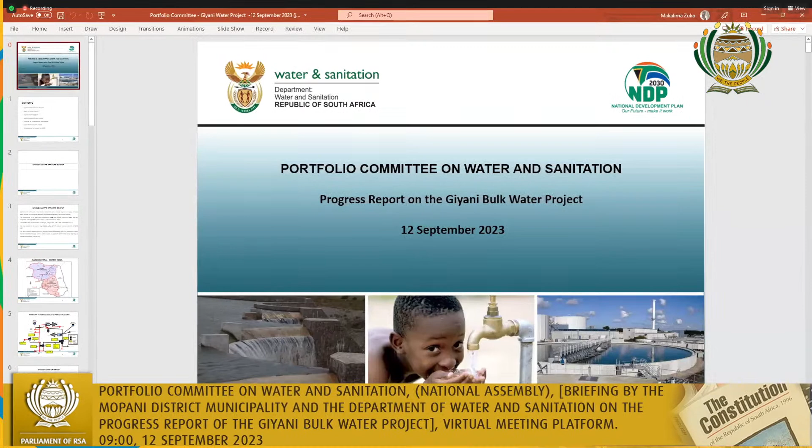Chair, I just propose that I hand over to the DG, and once they have had the opportunity to present, we can then make comments on a number of areas in the interest of time. So DG, I hand over to you. Thank you.

Thank you very much, Minister. Good morning, Chairperson and honourable members. The presentation will be made by DDG Mate. Over to you, Rizzi Mate.

Thank you, DG. Morning, Chairperson, Minister and DMs. I'm just testing to see if I'm audible enough, Chair. You are very clear, okay and cool.

I'm going to take you through the presentation on the Giyani water services. Our content, Chair, is basically to give a background. We are going to give an update to the committee specifically on the Nandoni water pipeline, or the bulk line. We're also going to give an update or progress on the water services, and the Nandoni water treatment works upgrades. We're also going to touch on the Nandoni-Nsami pipeline project, which is not yet completed, but we'll go into the details.

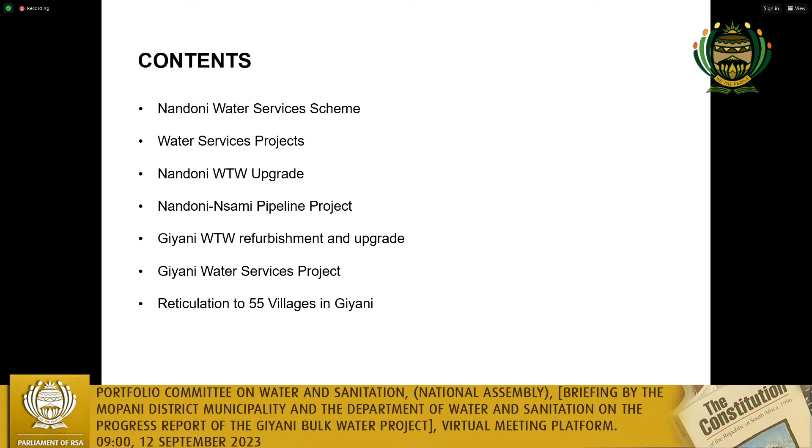Chair, I will touch on the upgrade and refurbishment of the Giyani or Nsami water treatment works. We'll also touch on the water services, the other bulk services, and then conclude by giving an update on the reticulation of the 55 villages.

The next slide touches much on the Nandoni water services. This is just the background, Chair, which I think we have spoken about in the past, but we've included it so we keep the whole conversation and the update thereof going. This slide indicates the origin or genesis of the Nandoni dam, when it was established, and also the capacity thereof.

To note, Chair, is bullet number 2: we have the Nandoni water treatment works, which currently sits at 60 megaliters per day. This treatment works abstracts water from the dam, cleans it, and currently supplies much of the areas under Vhembe district. We are also extending this very same supply. You will see in later slides that we are upgrading this treatment works from 60 megaliters to 120 megaliters, which will also supply parts of Collins Chabane under Vhembe and other areas. But we'll touch on those later.

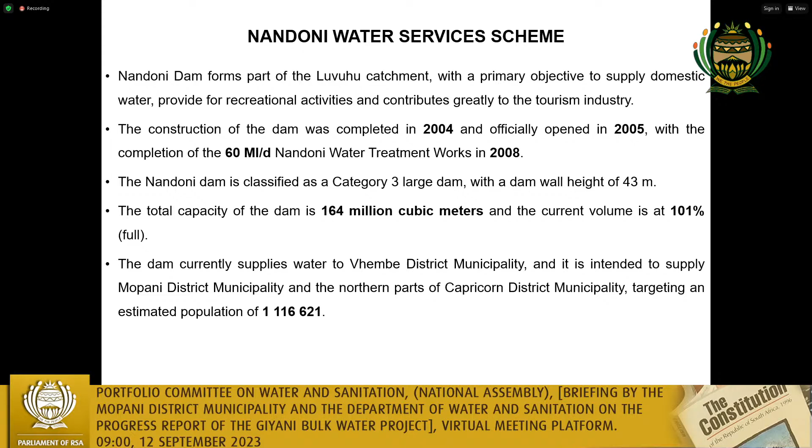We can go to the next slide. My slides are not moving.

The next slide, Chair, gives a summary view of what I've just spoken about: the whole Nandoni water supply scheme, in complexity, is meant to supply water to Vhembe district and also Mopani district. We are abstracting water from the dam, which ends in the Nsami dam, which is supposed to supply areas of Mopani, but we'll get to that. This is just a summary showing the layout plan.

Chair, I won't touch much on this. Safe to say this is basically the outline of all the pipelines. But what is crucial to see here, Chair, just to emphasize, is that where I'm putting my cursor, where you see Nandoni water treatment works, that's basically where the dam is also located.

We are abstracting water from the dam and then cleaning it at the Nandoni water treatment works, the 60 megaliter water treatment works, which we are now upgrading to 120 megaliters. As you see, Chair, there are two lines that leave the Nandoni vicinity. One is the arrow at the bottom, the shorter line that goes to Nsami Giyani - that's the raw water bulk line, which we will be presenting about now.

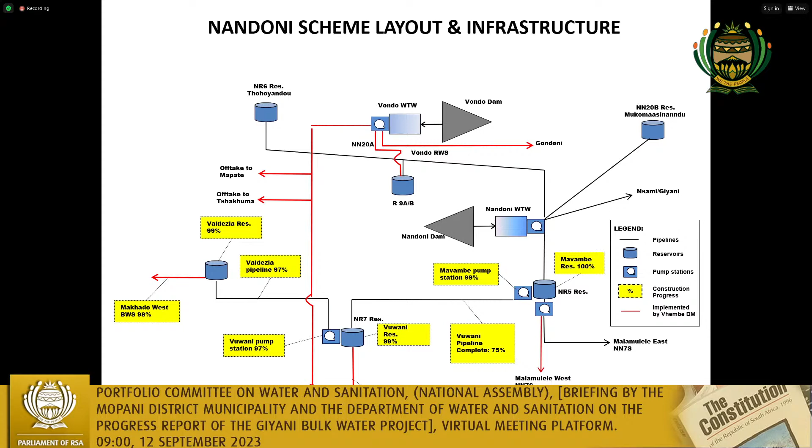As I've indicated, Chair, at the moment the treatment works sits at 60 megaliters a day. The intention now is to upgrade it to 120 megaliters a day. I think the committee will see later, when we go to the compartment of this project, we will be talking specifically about the Nandoni water treatment works. We can move to the next slide.

The next slide is just putting a bit more emphasis and a summary of what I've just spoken about, Chair. The first bullet talks of the current size of the water treatment works, which is the Nandoni water treatment works.

It's currently supplying 58 megaliters a day. The question could be, why is it supplying 58 megaliters a day when it's supposed to be 60? Chair, when water treatment works are designed, there is spare capacity to allow for treatment and facilitation, so that 2 megaliters a day is for circulation processes. However, in design, this treatment works is actually operating at full capacity.

It's currently supplying about 72 villages out of 207. The reason we still have a gap, Chair, is because as we extend the clean water pipeline to the areas I've shown in yellow, those villages not yet supplied by Nandoni water treatment works will start getting the supply.

We are putting emphasis that at the moment there are about 43 villages under Vhembe being supplied out of 72, while the others are receiving water through rationing, because the water treatment works have to be upgraded to at least 120 megaliters.

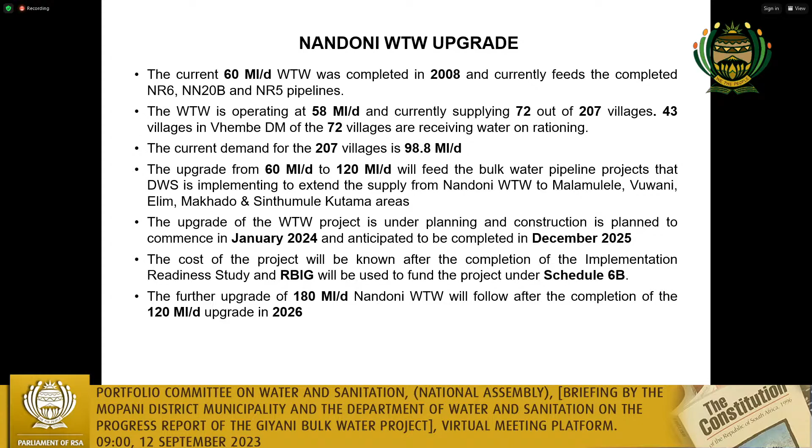We can move to the next slide. If we can move to the next slide, it's quite slow.

Okay, Chair, this current slide is already a summary view of what I've just spoken about. This talks about the upgrade of the Nandoni water treatment works from 60 megaliters to 120 megaliters. The dates on the right show how far along we are, but safe to say, in the last bullet of this table, all the preliminary design reports, cost estimates and everything, Chair, were completed in July this year.

So the rest of the planning work, funding, getting the PSP, and all the engineering studies have all been completed, and we are actually moving towards implementation. You will see in the next slide as we roll over to it.

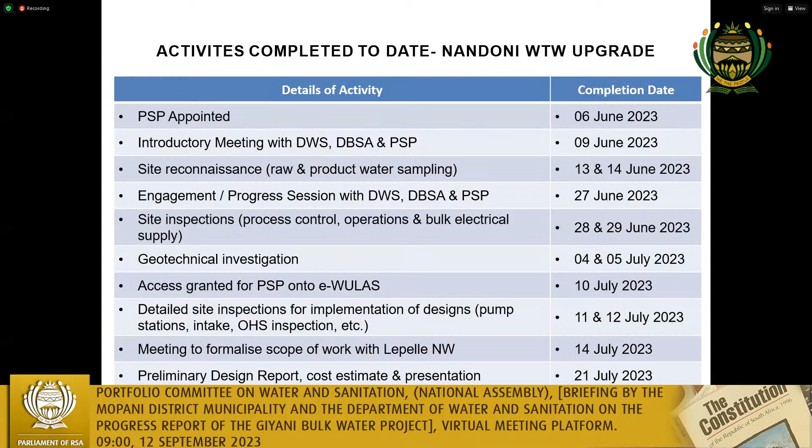Chair, as I adjust my English here, the current progress which is crucial to note on the Nandoni water treatment works is that the detailed design, which opened a space for us to go out on tender, is going to be completed now in September. We'll be going out on tender in October this year, with the tender closing in November. The intention is that we should be able to appoint the contractor before we go to the festive season in December, and construction for the upgrade of the Nandoni water treatment works from 60 megaliters will basically start when we open next year in January.

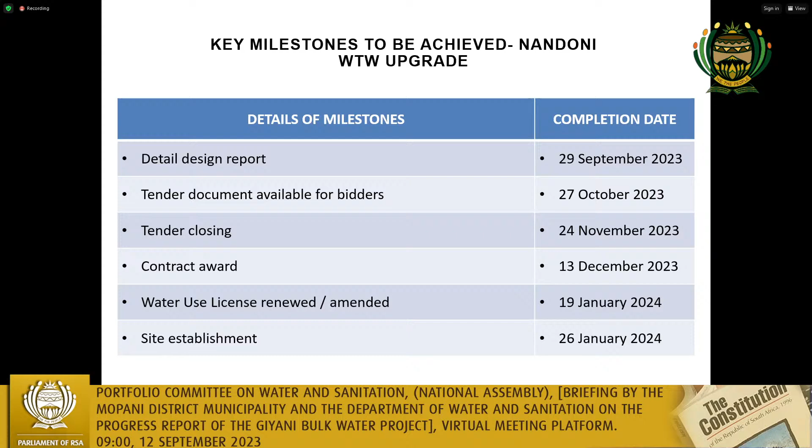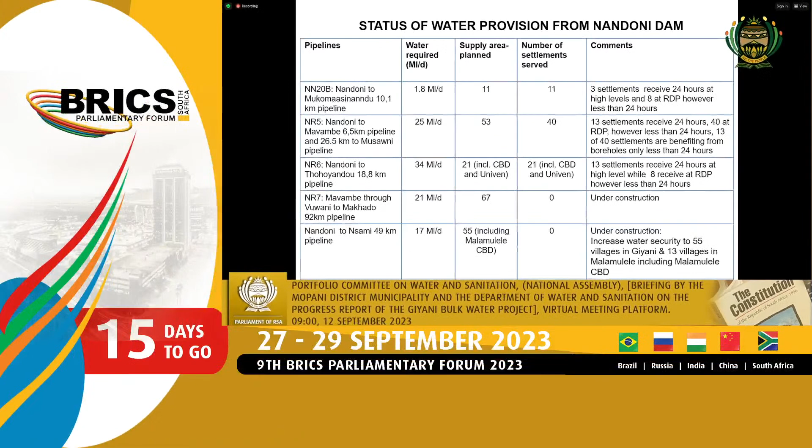Chair, this is the current status of water provision from Nandoni. We included this slide just to indicate the current supply capacity and where we have got the deficit. For instance,

No, colleagues, please mute your mics. Mute your mics, you are disturbing the presenter, please. Thank you, Chair.

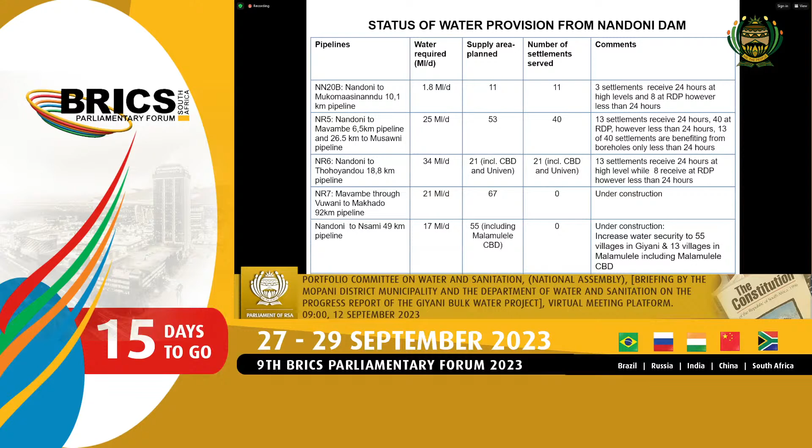So this slide, Chair, the key issues to pick up is that we have done the projection, and as you see at the bottom there, the total says 98.8 megaliters. As I've indicated in the previous slide, the current projected demand for the Nandoni water treatment works, after adding some of the villages, we are looking at 98.8 just on clean water. There are around 207 villages that need to be supplied from there, and there are about at least 72 settlements that are currently being served.

But what is crucial to pick up from this slide, Chair, we wanted to indicate and show the committee the various capacities and pipelines which are basically getting water from the Nandoni Dam. As you can see there, the last column before the total, we've already integrated the Nandoni to Nsami 49-kilometer pipeline, which will be pushing at least 17 megaliters a day to those 55 villages, which we'll talk about.

So this is an aerial view when we spoke about the 207 villages that are supposed to be supplied, and how the apportioning of different demands for each and every area that will be supplied directly from the Nandoni Dam. So it is a big scheme, so many villages that have to be supplied. There's about 72, but there will still be more villages which will be supplied. And how will they be supplied, Chair?

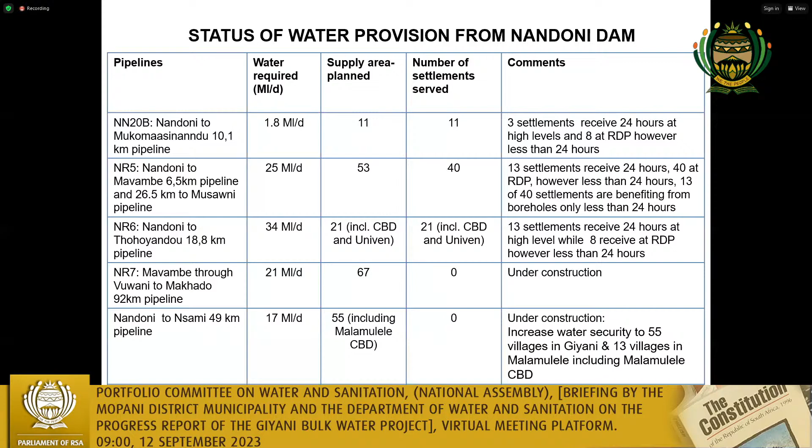If you can move to the next slide, it's quite slow on my side. Chair, okay, just move again. The next slide.

Thank you, Chair. This one is the overview of the bulk line. I won't touch much onto it, it's safe to say that it just indicates the project in a broader sense - the Nandoni to Nsami project, the raw bulk line, the 40.5 kilometer diameter, which has now been laid and completed. It indicates the different components of that project, Chair, and also the project cost thereof, and the timelines of when the project was basically started. Just to indicate some of the components, like the pump stations, the associated chambers, and also the road and river crossings, and the pipe sizes that have actually been laid on the ground.

Can move to the next slide.

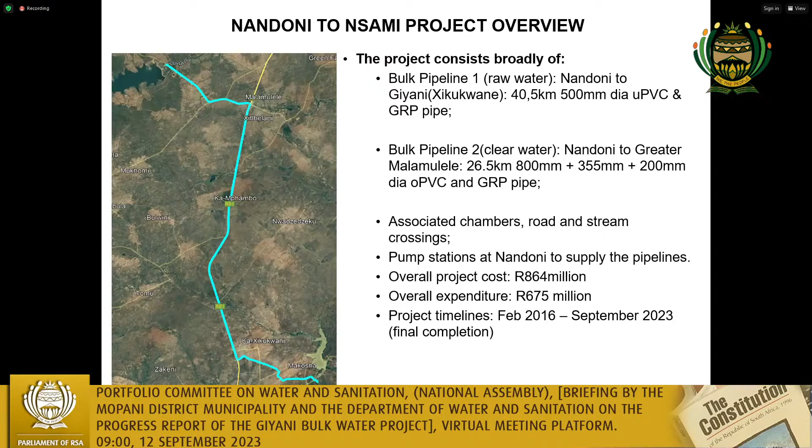Also, Chair, this slide just talks about the agreed approach to expedite the completion. Just to spend a moment on this - after the minister was appointed in 2021, part of his commitment was to ensure that there is an acceleration in this project, and that the communities of Giyani should get more additional water from the raw water pipeline. Those interventions, Chair, resulted in the department accelerating the project and also dealing with some of the bottlenecks that were in the system.

Now, one of the key issues was that the existing bulk line had to be finished so that we are at least able to discharge water directly from the Nandoni to Nsami to the canal. As the Chair is aware, the Middle Letaba Canal upstream - in the dry seasons we're not actually getting enough water thereof - and we should also utilize the existing infrastructure. Areas around Mavambe, those communities there, they still had some of the services, so the upgrade of the treatment works and getting some of the clean water through will actually offer more support to those communities.

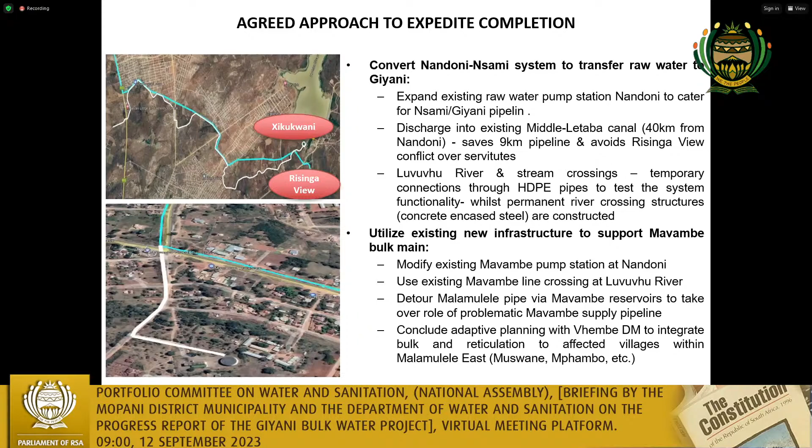Chair, you are aware that communities in that area managed to stop the project for a while because they felt they're not getting water from the municipality, and they had issues tapping into the old raw pipeline. Those issues have now been resolved and the project is basically completed. This gives an overview of the adaptive planning done to ensure the project reached finality. We can move to the next slide.

Chair, the summary, this slide talks to the whole Nandoni to Nsami bulk line. The project overall is sitting at 95.7%. We are just left with the snag list. The pipeline is completed, the whole length of the pipe. The temporary connections and the river crossings are all finalized.

And Chair, as you're aware, by April, the 5th of April rather, we already had water. We managed to ensure the project gets practical completion. Water for the first time in history arrived in Giyani, in this case, the canal in Xikukwane. And we then had to do the permanent sections.

If Chair could remember, when you leave the Nandoni Dam water treatment works, there used to be a black pipeline running across the river crossing, which was a temporary section. Chair, we can confirm without a doubt that that pipeline has now been decommissioned because we have now completed the permanent sections. And as you walk along that pipeline, you will remember there were a couple of river crossings.

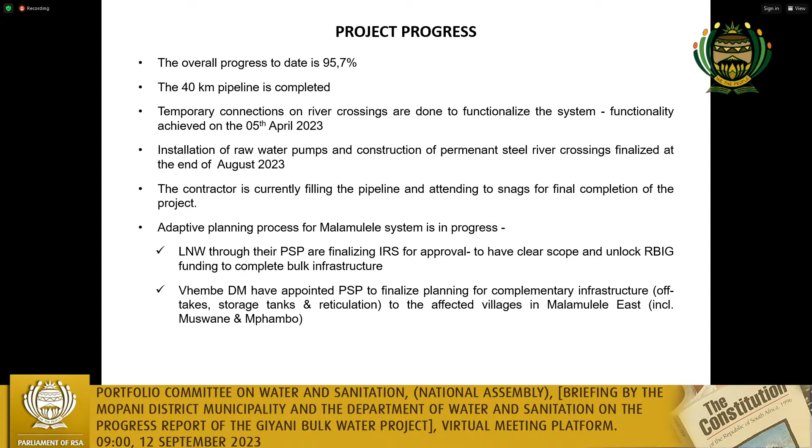Yes, moving quite slowly on my side, Chair. Like you jumped a slide.

Chair, I won't touch much on this. I think it's safe. We wanted to inform the committee on some of the challenges that were faced, the reasons for some of the delays. There were a couple of changes on the scope of work, Chair, to the project, the integration of the clean water pipeline, and also access being denied.

The minister and DM Mahlobo were also in the front line of this. Also, DM Tshabalala being involved in attending to some of the community issues when we were denied access. So we have managed to resolve all those issues as a department.

Issues of restrictions, in the previous slide, Chair, I did indicate there were issues with access restrictions around Xikukwane and Risinga View. This is exactly where the water lands in the canal. The community did stop the project there for a while. However, we are grateful that all those issues are a thing of the past now.

Of course, the floods also had an impact on delaying the project, but we felt it's crucial for us to highlight these issues in the summarization of the impact they had on the project. Let's move to the next slide.

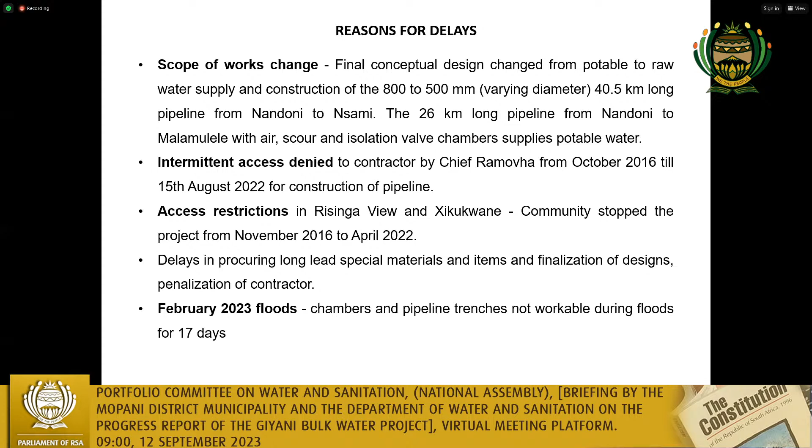Now, this part of the presentation seeks to present to the committee the current upgrade and refurbishment of the Giyani water treatment works, which in essence will be receiving the same raw water leaving Nandoni to Nsami. As I've indicated before, Chair, the Nandoni dam is also supposed to extend to those 55 villages.

You would have seen in the other slides where I put an emphasis that when we did the overall integration of what will be supplied from Nandoni, we have already for now included those 55 villages. So those 55 villages will be getting a direct upgrade and supply of water from the Giyani water treatment works.

Chair, there is a refurbishment work to get that water treatment works to its optimal capacity. It is a 30 megaliter water treatment works, but currently it's not operating at that capacity. It's actually operating at 17 megaliters a day, if you see the third sub-bullet from the bottom. The intention of the department for phase one, Chair, is to refurbish that treatment works and get it back to its optimal capacity of 30 megaliters a day.

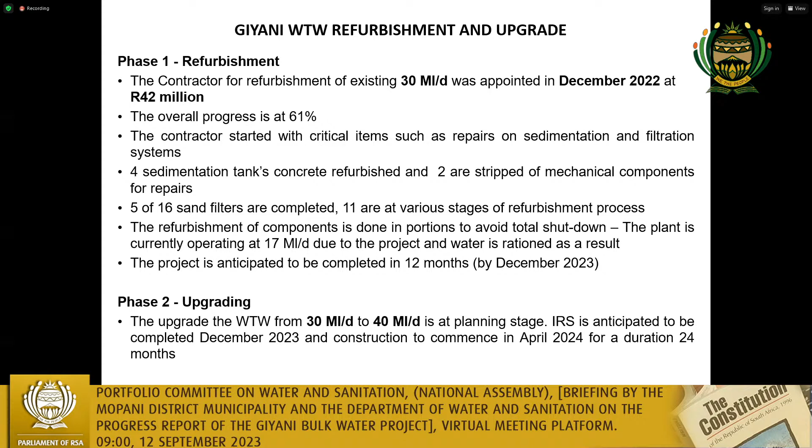Okay, move to the next slide. Move to the next slide.

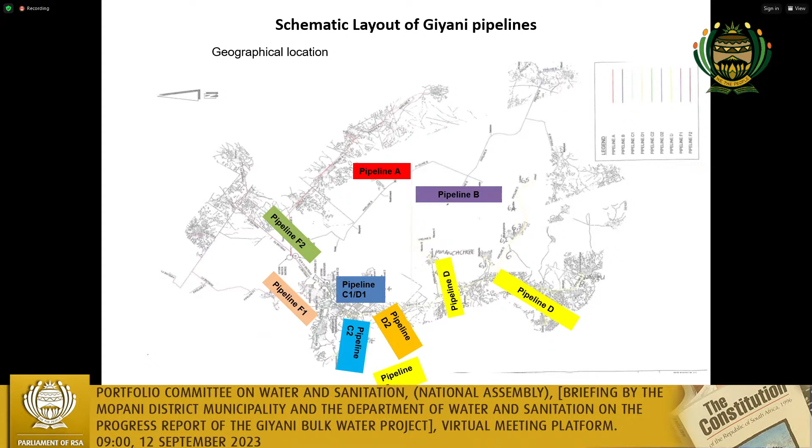But you will see in the next slide how each pipeline is grouped to feed a particular number of communities or villages in that area of Giyani. So this is just to indicate a schematic layout, but you will see further details in the next slide, how these pipelines are linked to different villages and how much progress has been made so far. Let's move to the next slide.

Chair, this slide just indicates the current update and the progress thereof, and also the amount of money that has been invested in this project. But the key issue to pick up, Chair, is if you look at bullet number 2 and the last sub-bullet there, 1, 2, 3, 4, it talks to the 55 villages. It talks to the length of the 325 kilometers of pipeline. So those 8 pipeline sections are basically contributing to at least an amount of 325 kilometers of pipe length, and they supply those 55 villages as I've indicated.

However, you would have been made aware, Chair, and even when the portfolio committee visited Giyani, that there were still some villages which had water problems, and there were questions asked also in the past on what actually happened to the issue of the boreholes that were installed in the area. We have included the information just to make the portfolio committee aware of the previous works from 2014 to where we are. But I'm zooming straight directly, Chair, to how the 8 pipelines are linked up to those villages, the overall cost estimate, and the current progress to date, and you will see in the next slide.

However, I must emphasize here, Chair, that the construction of those 8 bulk lines is basically done by our DWS construction unit, where Lepelle Water Board is basically the implementing agent, implementing the project on behalf of the department in that area. We can move to the next slide.

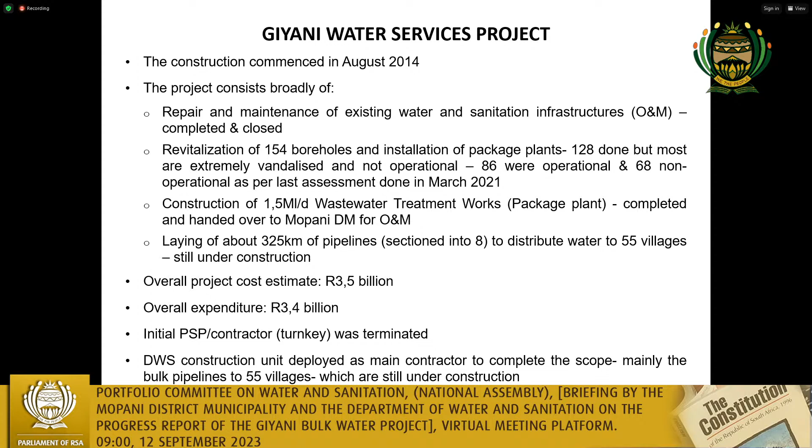Chair, this slide is quite crucial because we have now started grouping all those communities per pipelines. I'm going to take a bit of time to indicate here, in this table, number 1 is the village number. We also have the bulk pipeline, and we have the village name.

For instance, if you count for pipeline A, you will see village number 1, 2, 3, 4, 5, and 6, and then it ends there. The village names are Thomo, Khakhala, Gawula, Mahlathi, Ndindani, and Hlomela. So pipeline A, seen in the previous slide, is linked to these 6 villages. Pipeline B takes villages from village number 7 until village number 17, with names from Homu 14A all the way to the last village.

So when you look at pipeline B, you know it gets water directly from the Giyani water treatment works, clean water, supplying pipeline B, which then feeds these communities indicated here. You'll also get to that stage in the next few slides, that all these villages from number 1 to 17, as well as 18 to 33, form part of the 55 villages which are being reticulated now.

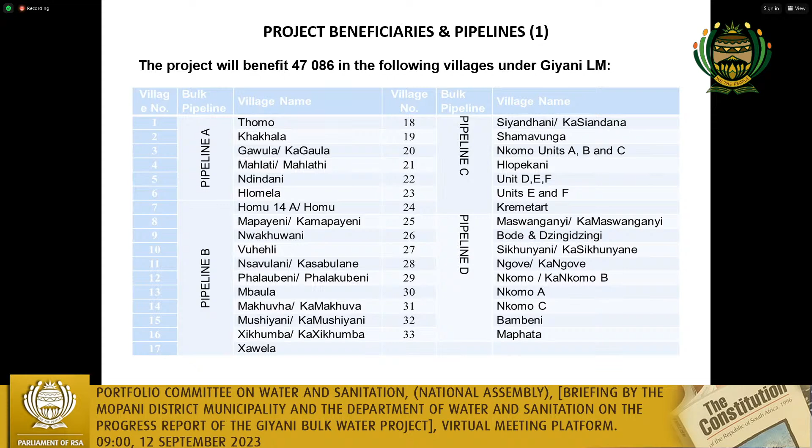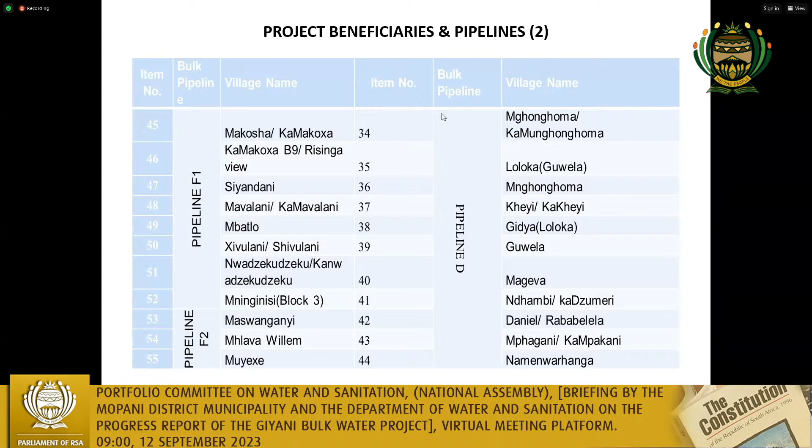Can move to the next slide. So the next slide is just to show the balance of the other villages. There we stopped at 33, you've got 34, 35, 44, all the way to 55, and then we just swap them around. You'll forgive us for that.

Safe to say that from village number 45, which is Makosha, and all the way to Mninginisi, those are fed from pipeline F1, this one F2, and so forth. So all these 55 villages are not in isolated planning, Chair. They are linked to the entire project.

What is crucial to add here, Chair, is that the portfolio committee will remember that when the whole Nandoni to Nsami bulk line, as well as the upgrade, and the reticulation of these villages, was basically brought forward by the minister. After his intervention, the instruction was given that we need to accelerate reticulation of the 55 villages. So we had to run fast with the planning and ensure that Mopani is assisted by the department through our grants, that the reticulation for these 55 villages is basically done.

In other words, we're going to have the bulk lines, Chair, with clean water, but these communities were still going to struggle to get more clean water, because in those areas there were actually issues of water supply. So the extension or acceleration of the 55 villages is basically coming in handy for those communities in Giyani. Let's move to the next slide.

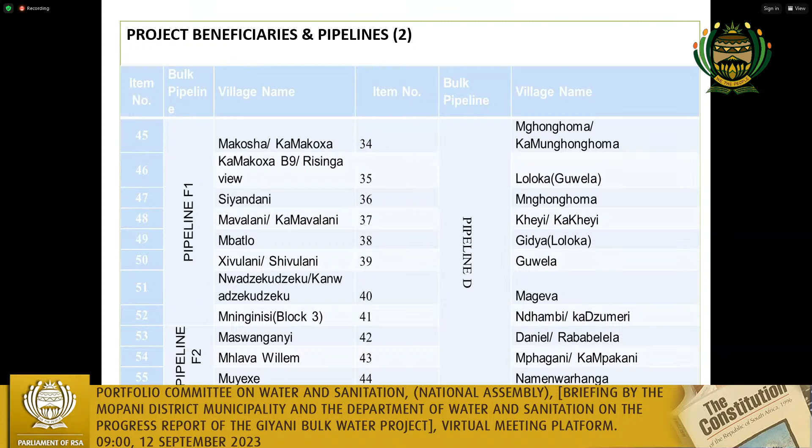Can move to the next slide. It's quite slow on my side, Chair. I apologize.

So, Chair, the overall progress for the bulk pipelines, pipe A, B, and all those 8 pipelines was sitting at 64%, and the intention is that they should be completed next year. The question might arise as to why all these pipelines or bulk lines are not completed, and how we intend to complete them. I must put emphasis that those bulk lines, those 8 pipelines, are actually linked to our plan to phase in the reticulation of those 55 villages.

The intention is that when a particular block of communities gets the reticulation, we also need to ensure that its supply pipeline or bulk pipeline, whether pipe A, pipe C or so, needs to be completed by the time we complete the reticulation of that particular village or group of villages. So this is how the system has been interlinked.

The reason it's planned like that, Chair, is to avoid infrastructure being on the ground, never utilized for years, and getting vandalized. By the time we're done with reticulation, the department would have to fund again to refurbish that infrastructure. So the project is integrated in a manner that it's not overly costly for the department, and we are doing it in a phased approach.

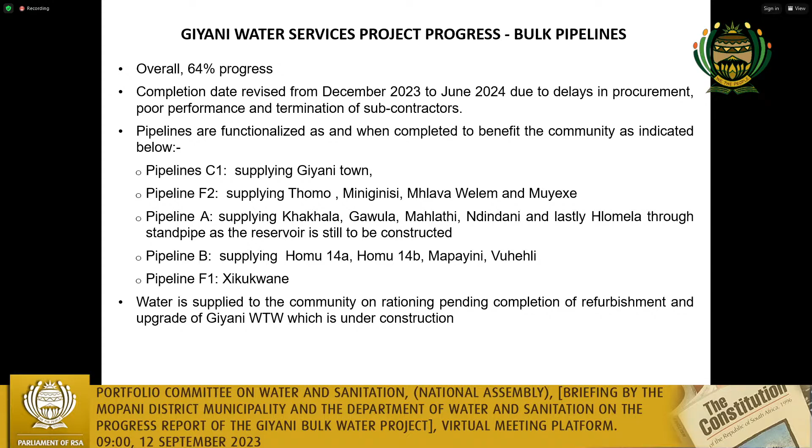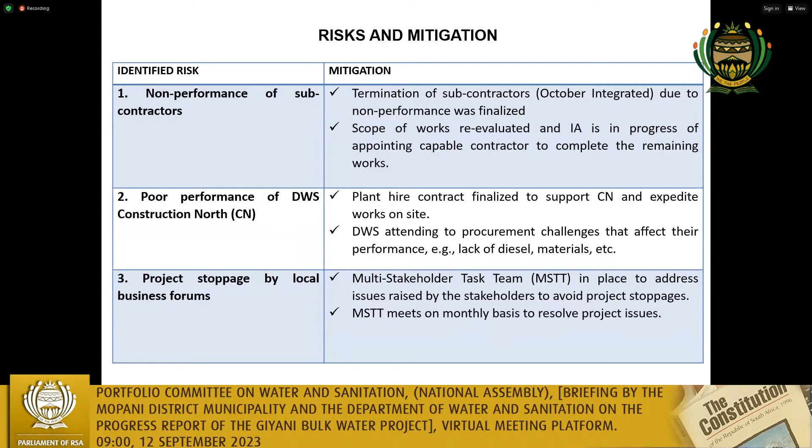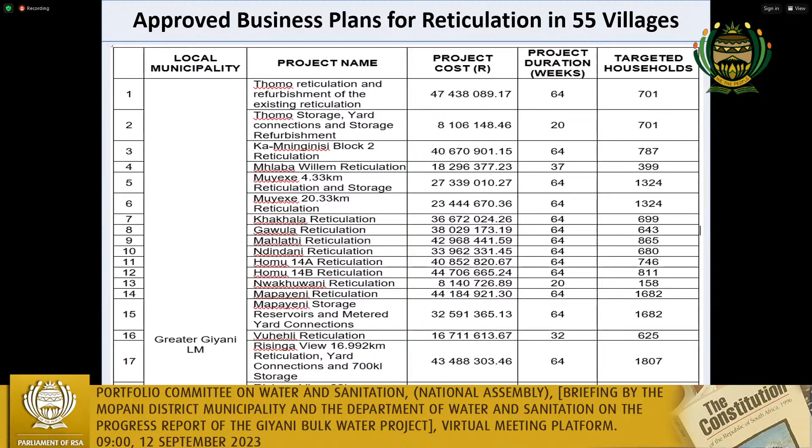Let's move to the next slide. Also an extension of the previous slide, indicating the number of households to benefit, the budget attached, and the project scope. You can see, for instance, in number 19, Risinga View, 17.35 kilometers. I'm deliberately mentioning Risinga View because this is one of the communities in Shukukwana that basically stopped that project because they needed water. So they have their own project aligned to that, including some storage capacity. The value of the project is there, and that is the number of communities that will benefit from it. We can move to the next slide.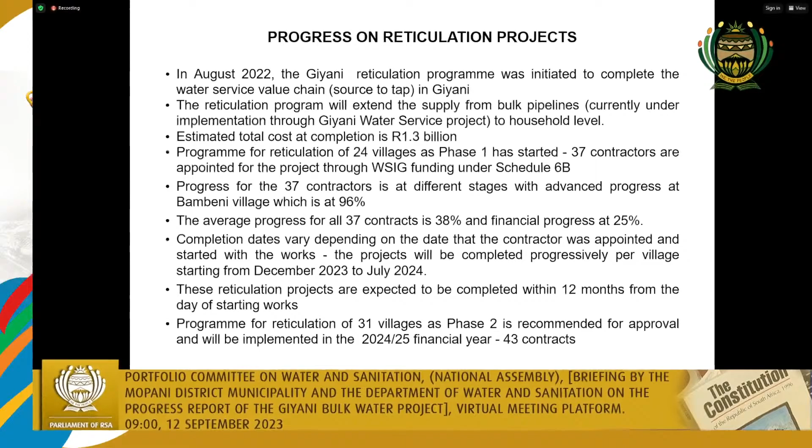So the implementation of this project is under 6B, where the department holds the money. It then goes for due diligence. When work is done, we do the verification, invoices get verified through their PSP as well as our regional office, led by Lucy. Thereafter, the invoice gets paid. That is how we have put in safety measures when it comes to the funding of our grant.

Over and above that, Chair, the department, through the directive of the DG, was involved in doing due diligence in the procurement processes of those contractors to ensure the department satisfies itself. Also, our CFO has on several occasions been touching base with the CFO of Mopani as well as the MM to ensure that we don't violate the DORA framework when managing those funds for this reticulation. I felt it's crucial to emphasize this point, to assure the committee that the department has put in control measures when it comes to the funding of this project.

Chair, overall, 37 contracts are on the ground, on average 38%, and the financial progress of the allocated amount is 25%. As I've said in the previous slide, there's a phase 2, which means the balance of the 31 villages will start, planned for the next financial year. This will generate 43 contracts. The current phase has generated 37 contractors, but phase 2 of the 31 villages will generate about 43 contracts when it starts on the ground.

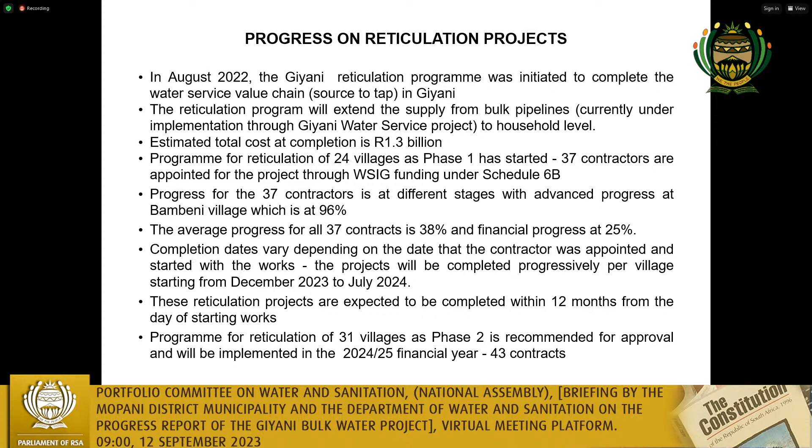Chair, what is crucial to pick from these slides is a few issues. As I've indicated, all 37 contracts have been appointed, though some were appointed quite late recently. Safe to say the whole physical progress on the ground is sitting at around 38%, and the financial expenditure is sitting at 25%.

I know, Chair, a question might come: how come in Ngove A and Ngove C we still have less progress, at 0%? These are the last few villages, which were appointed recently by Mopani, but the department is working with them to ensure progress. The good thing is that all 37 contracts, covering all 24 villages, have actually been appointed, and we are on the ground.

Each project runs for 12 months. For instance, look at Bambeni, the first village. It started in December and should complete in January next year. The progress on the ground is sitting at 96%, because that project was one of the first to start last year. You can see the percentages for each project, but on average, all of them are sitting at roughly 38%. We can move to the next slide.

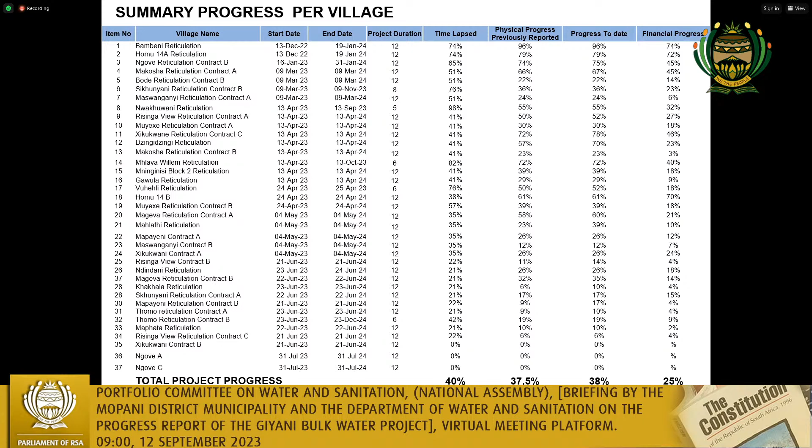So Chair, this is just to show some pictures on the ground. This one on the left shows the suspended storage reservoir, in Bambeni, linked to the reticulation of those villages. The one on the right is the Mageva pipeline. You can see the dates the photos were taken - this one on the 19th of July in the afternoon, the other in June. So these are quite recent projects linked to current progress on the ground of those 55 villages.

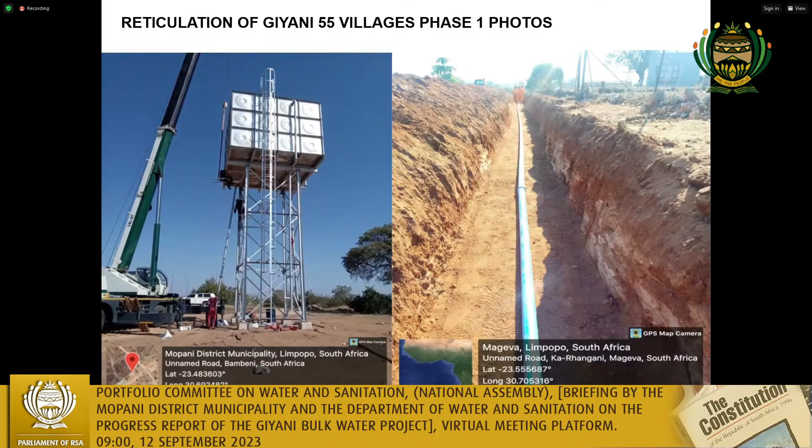Move to the next slide. I think we're almost done now, if not the last slide. Can we move? Quite slow on my side, it's taking a bit of time.

Chair, DG, if I could. I take it that the DG is covered on the side of the department, departmental management of the projects. Just to make a comment, let me start with the negative one.

The negative one is that, as you saw Chair, the project of the dam - Nandoni Dam - was completed in 2004. That's a fairly long period, it's quite old, heading for 20 years since completion. We shouldn't be where we are, almost on all aspects.

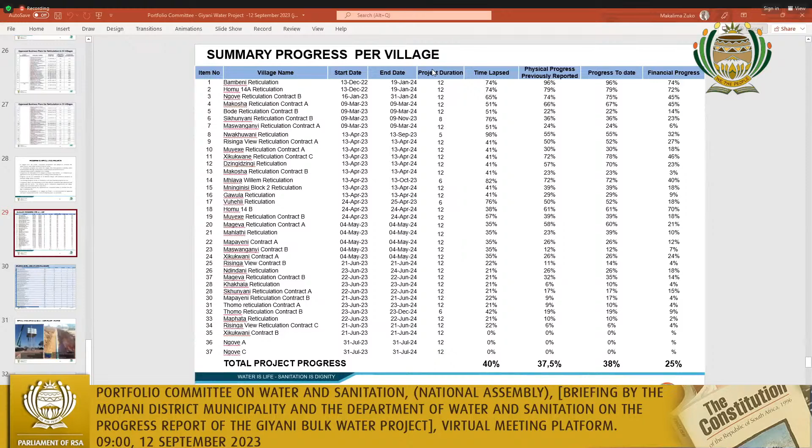We will cover them. If we could get the list that you ordinarily have, we'll combine it with an effort of hunting down these boreholes, because generally we don't want abandoned projects. We encourage water service authorities to look after them and complete or do something about them. We'd like to plead for that list so that we can follow it up.

But generally on infrastructure and security, there's one example we recently came across in our intervention in Emfuleni, when we spent a day looking at various sites to check progress of intervention 63. I was quite delighted to see a number of now refurbished and upgraded projects, completed because quite a number of these were going to be finished by the end of August — pump stations and other projects, especially wastewater plants, like the one in Leeuwkuil and Sebokeng.

What Rand Water has initiated is to provide infrastructure for guards, which were not there before. I'm talking about pump stations that had deteriorated to non-functionality, and wastewater plants that had also deteriorated to non-functionality. They've refurbished and are refurbishing in some cases, upgrading and so on. But one of the things they've added is security guards — armed people, and even security dogs. I was quite delighted by that, and they say since they ventured into this, there have been no cases of theft or vandalism.